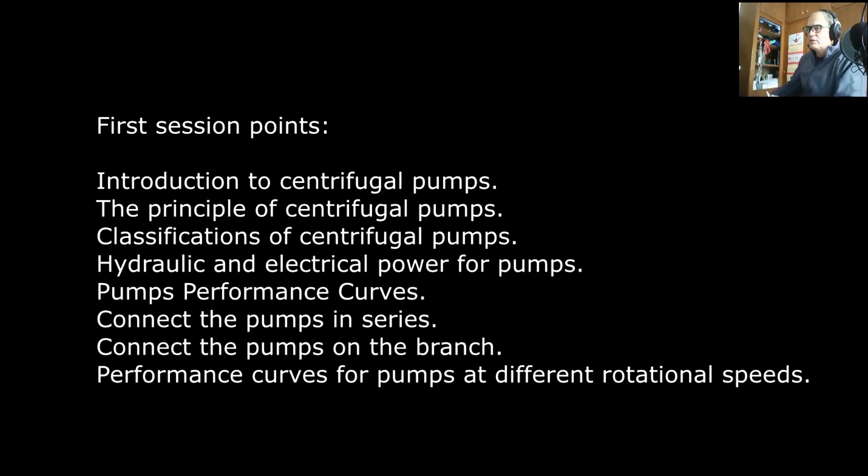Many thanks to you. Today we are going to speak in the first session about the pump. This is Haytham Bakour, Mechanical Engineering, graduated in 2002, and I work as wash coordinator with ACU.

We are going to start about fundamentals of pump science, categorizations, and else.

These are used more than 95%. It has horizontal and vertical kinds of pumps and different kinds of pumps.

First, what is the purpose of using the pump? We are using the pumps to move the water from a low level to a tank in higher level, so from low pressure area to higher pressure area.

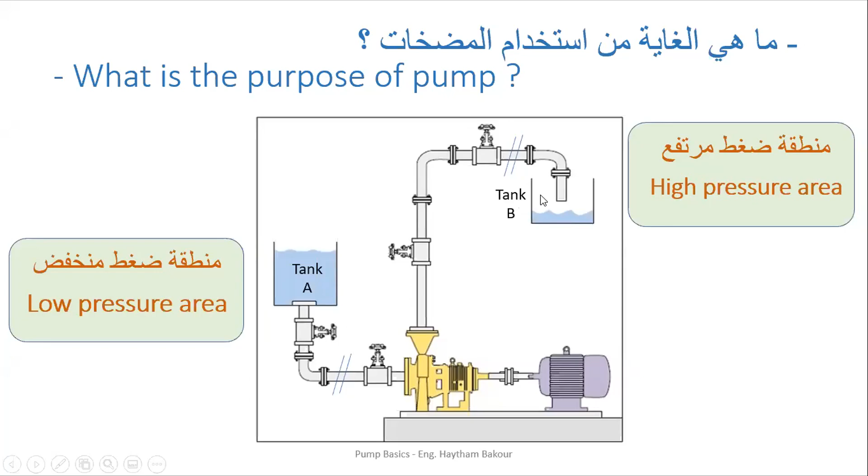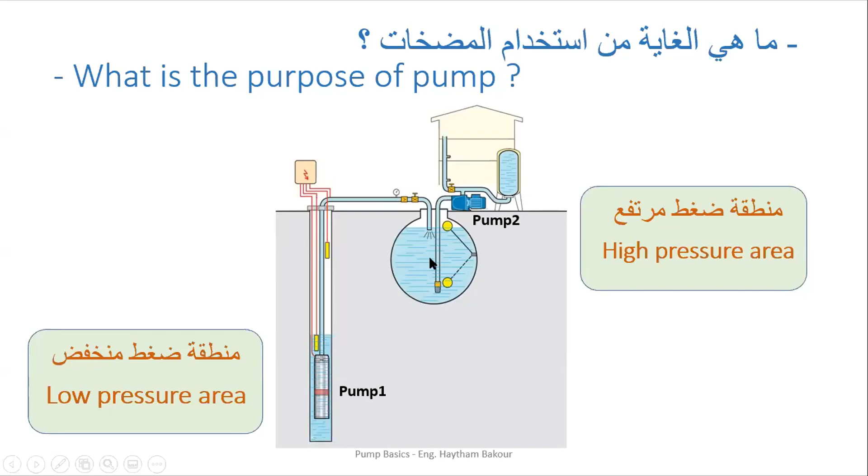The other example is that we are pumping the water from a well into a ground level tank to serve the population through using pump 1. As pump 1 is transferring the water to the first tank, pump 2 is going to transfer the water from below the building to the building. So the pump usage is to transfer the water from a low pressure area to a higher pressure area.

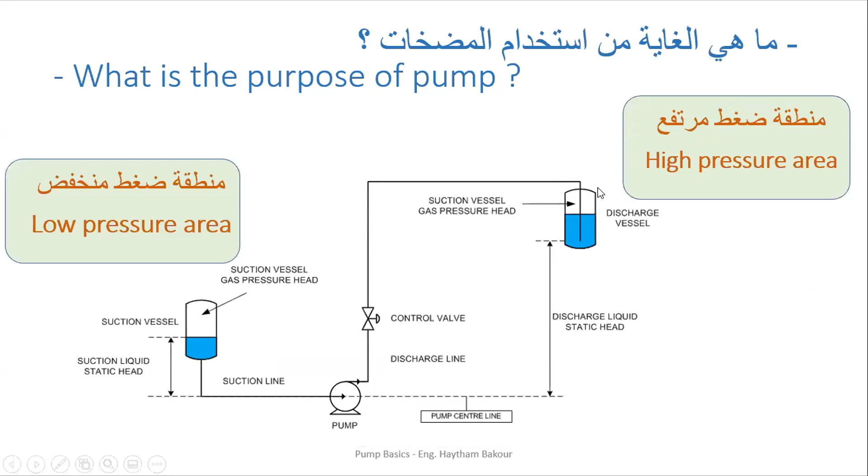As we can see in this chart, it is transferring water from the lower tank to the other tank in the upper right corner.

The other part is the shaft of the pump, and it is the part transferring the power from the engine, either electrical or diesel engine, to the impeller to move the power and make it rotate. And the shaft seal protects the water within the pump, preventing it from leaking to the bearing and the shaft, as the water in this section is guarded and prevented from leaking.

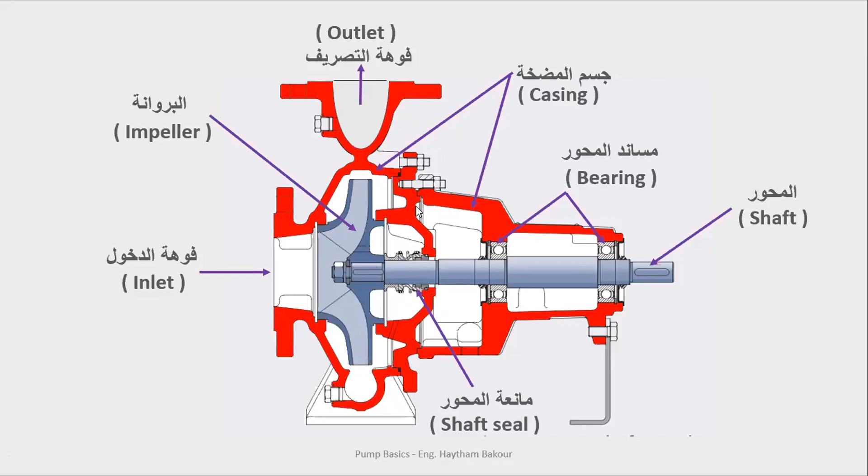We can see in this chart this section of the pump. As we can see, it is the entrance. The water is going to the impeller, and the impeller pushes the water upward to the outlet. The shaft here is moving the movement to the impeller.

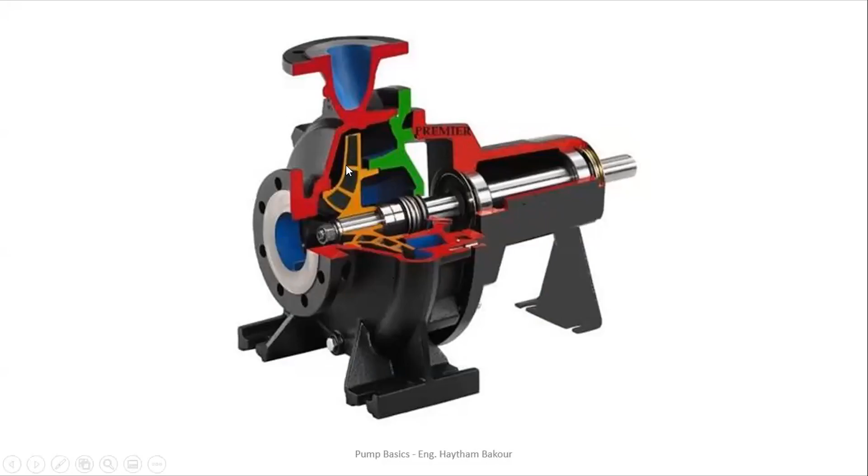We can see here an example of it, a very good movement example, from the inlet to the impeller and then to the outlet, pumping the water to the upward outlet.

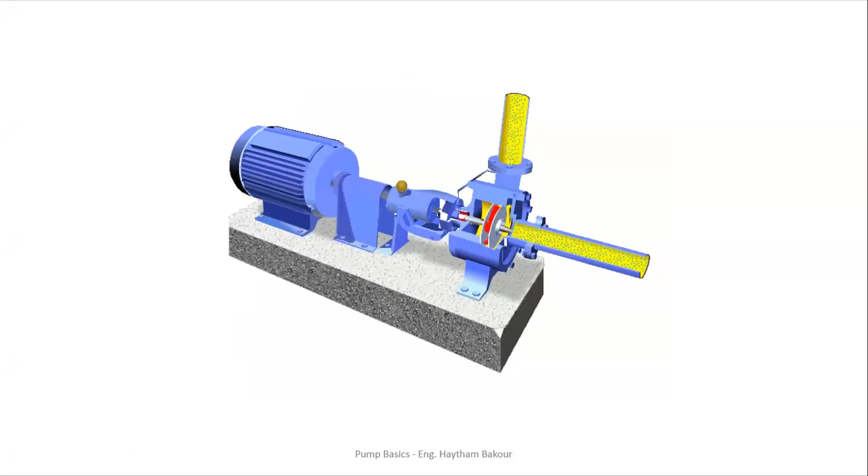The water enters here from the inlet and moves to the entrance of the impeller, which we call the eye of the impeller. In this chart, it comes from down below, and then the water goes between the impeller, gathering in the surrounding area, and then it goes out through the outlet of the pump.

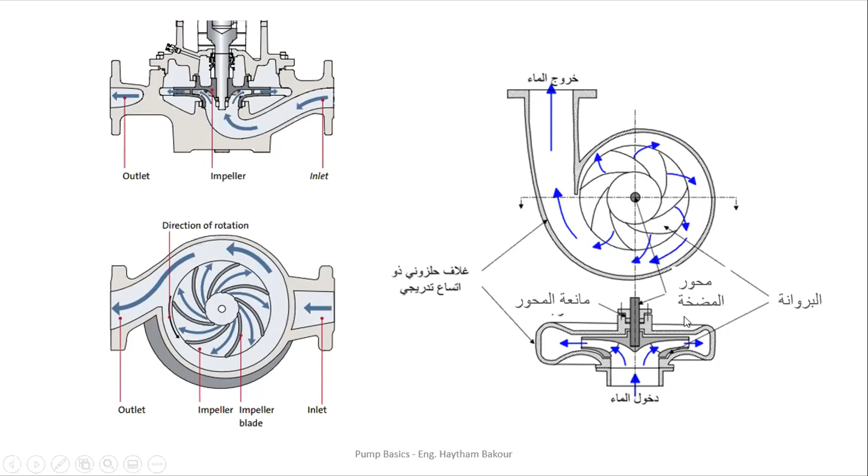This is another chart with more details and more naming of the parts, to give more detail about every part of this pump. We are going to talk about the classifications of centrifugal pumps.

We are going to speak concisely, in short, as many classifications are based on the reference and the company categorizing this. We are going to talk about centrifugal pumps used in everyday life routine.

One of the classifications for pumps is about the shaft position. If it is horizontal, it would be called a horizontal pump, while if the shaft is in a vertical position, it would be a vertical pump.

When there is one impeller in the pump, it would be called single stage. So the pump on the right would be called vertical single stage, while the one on the left is horizontal single stage.

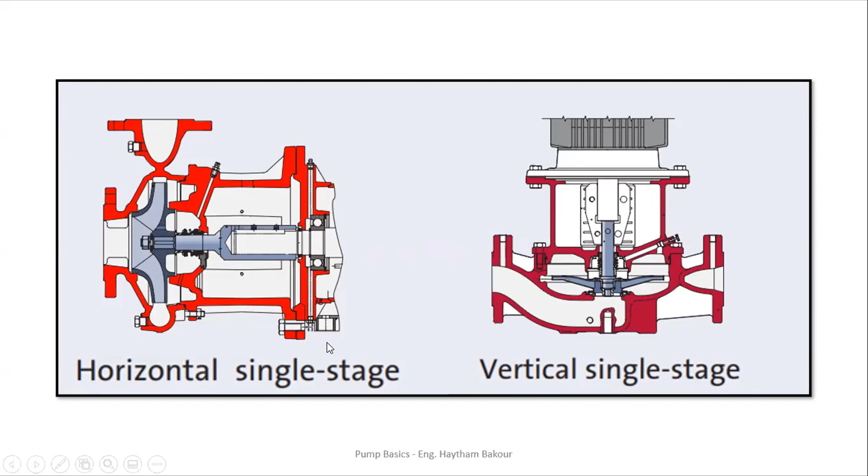We can see here two other kinds of pumps. The one on the right is a horizontal multi-stage pump. When we have more than one impeller, we have a multi-stage pump. On the left, we can see a vertical multi-stage inline pump.

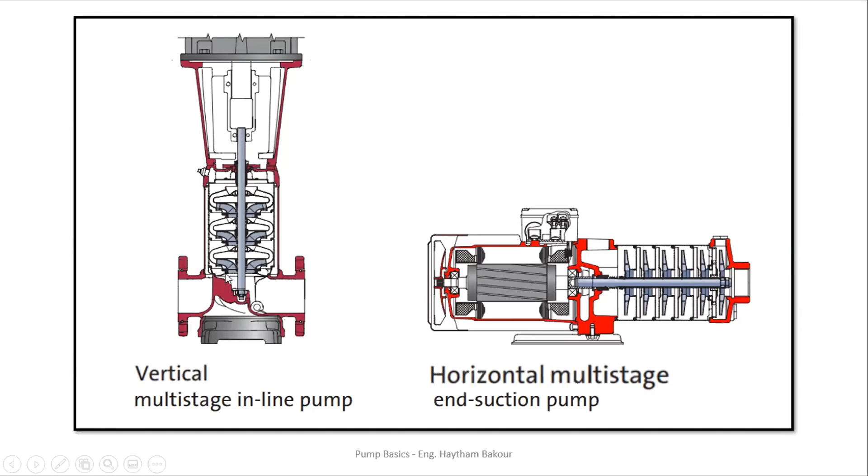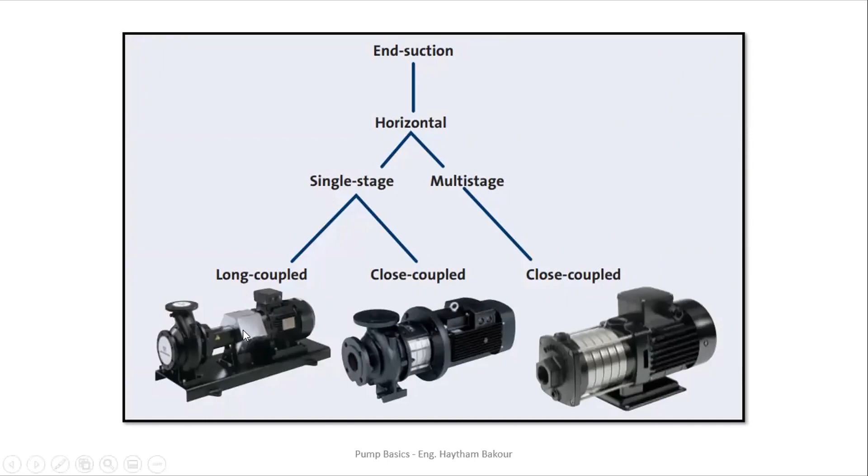There is another categorization for the pump where the motor, the engine, is separated from the pump, and something is connecting them together. This is called a long-coupled. But where the pump is directly connected with the engine, we call it close-coupled.

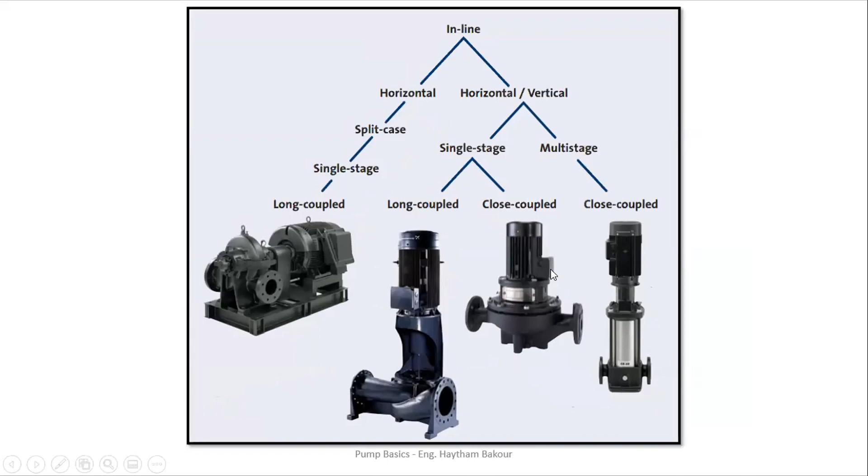We can see here in this chart many classifications based on one style of companies, which covers a very big part of the pumps, but we can't talk about all classifications of pumps as we have many different kinds, either vertical or horizontal, single stage or multi-stage.

And there is another categorization for the pumps based on the impeller shape or style. We have the impeller where the water enters from one side - this is a single suction impeller. While in some impellers the water comes from two sides, we call them double suction impellers.

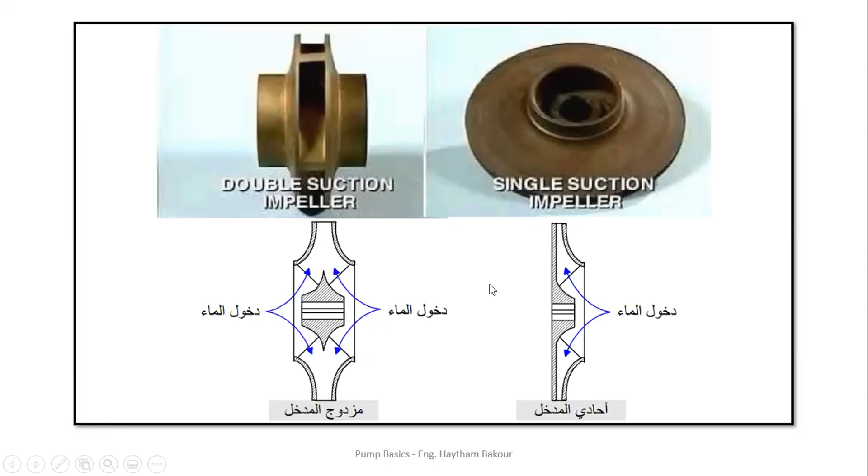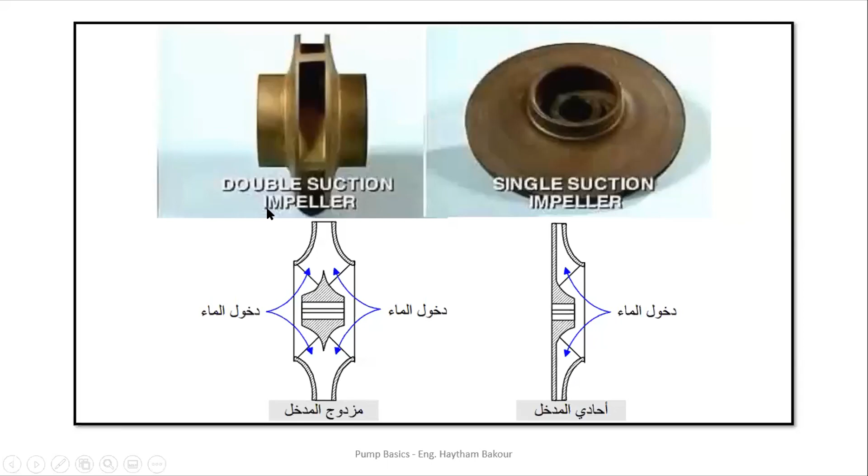The difference here is based on the design of the format. We are going to speak about the one-side suction impeller, where the water comes from one side and goes out from the surrounding - this is the shape of the pump. The second shape is the double suction, where water comes from two sides of the impeller and goes out from the surrounding, which needs a special design for the pump and its body.

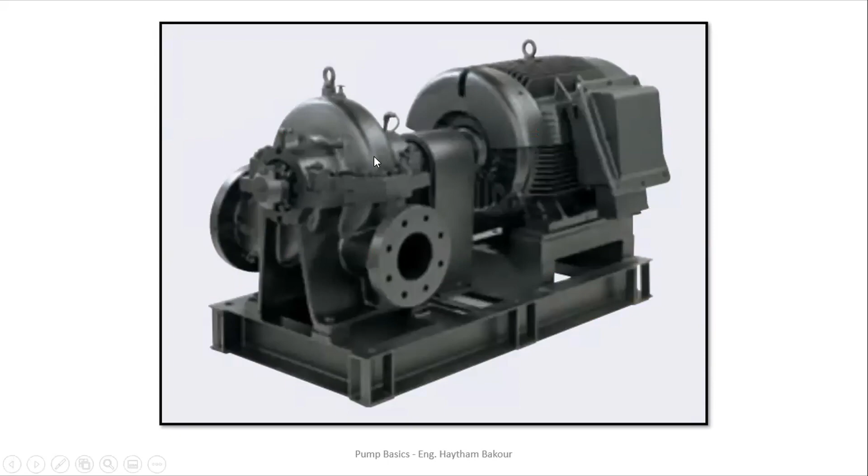We can see here in this picture, in the upper part, the connection, and the shaft beds are placed in different places. They are going to be on the sides of the impeller.

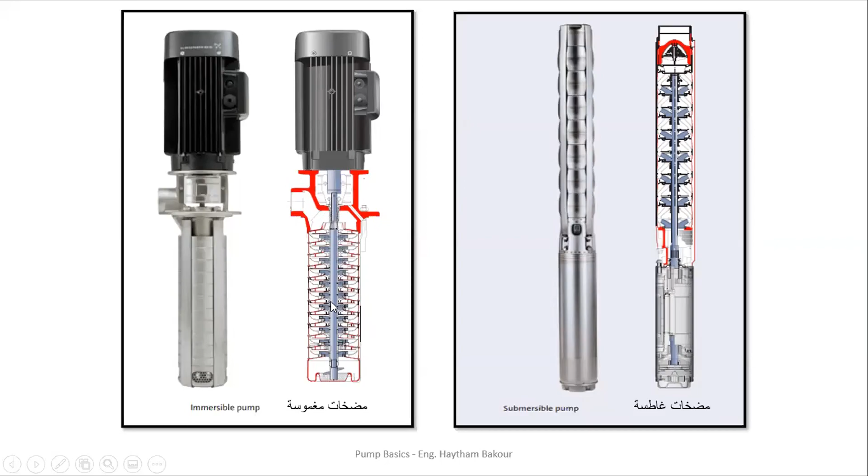There are some other categorizations for the pump. We have the submersible pump, completely submersible, where the motor is going to be inside the water completely, and those have been used mostly in wells. The other kind is the immersible pump, which is a vertical kind of pump where the motor or engine is outside of the water - we call them immersible pumps.

What are the advantages of centrifugal pumps? The pump has a relatively simple shape, as we witnessed, very easy to install. It has low cost in comparison to other kinds of pumps.

Thirdly, its reliability is high, with minor faults and it doesn't require much maintenance. If you choose your pump appropriately with high standards, it can work even for 30 years or more in continuous operation with some minor maintenance.

Fifth, it has multiple possibilities and uses, as we can use it for drinking water, sewage water, chemicals, even hot water. In addition, you can use it with different kinds of usages for power and for flow. We are going to provide you with some details later on.

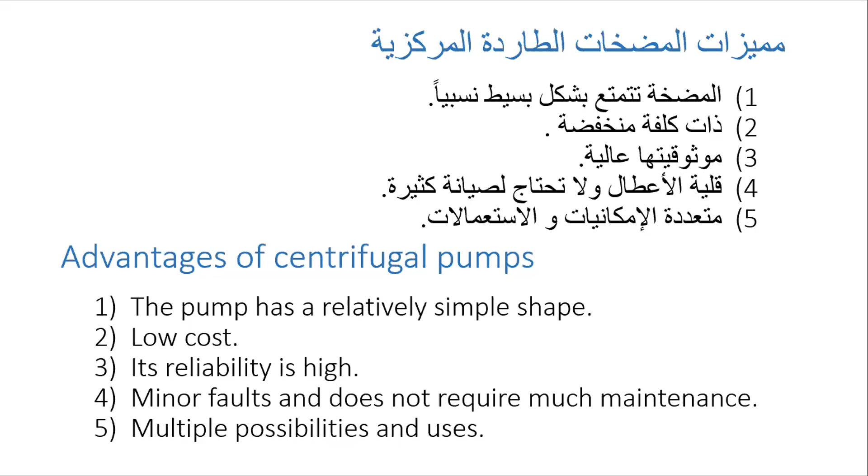We are going to speak under the second topic about the pump power equation - how we can derive those equations, how we calculate and arrive at them.

Firstly, we are going to speak about the sequence of power transmission of electrical pumps. We have electrical engines transferring power to the pump. We have P1, electrical power, through the electrical wires to the motor, the engine, and then we have mechanical power P2 on the shaft of the engine. This mechanical power is transmitted directly to the pump, and within the pump it becomes PH, hydraulic power.

The power is going in through the wiring, then it's going to be mechanical power on the shaft of the engine as one mass, and then it's going out as hydraulic power.

The first shape is the pressure shape. The other form is the flow, related to the amount of water we are pumping. We have motor efficiency, which shows some drop down in the level of efficiency of the engine. There's also drop down and losses in the pump due to hydraulic and mechanical losses, which we call pump efficiency. As pump efficiency increases, the loss percentage decreases.

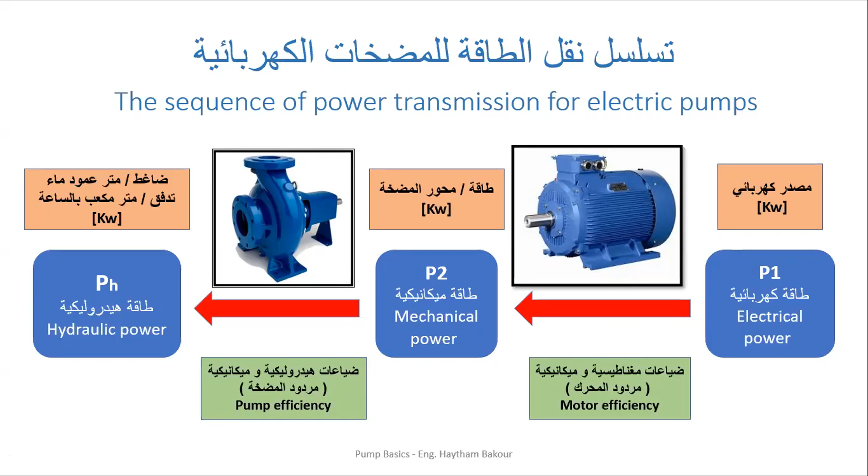This is related to the best choice of pump model and the quality of its manufacturer and specification. As we said earlier, pumps are used to transfer water from the low pressure area to the high pressure area, from tank A to tank B.

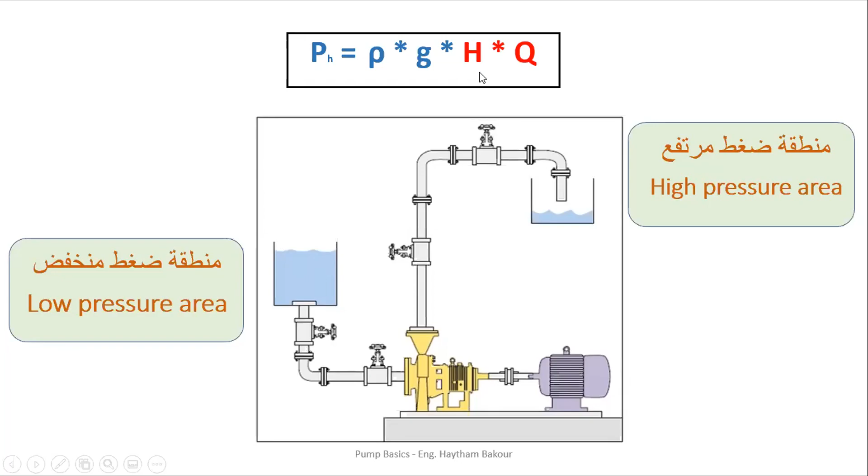The PH equation: rho is the density, g is the gravity, H is the pressure, and Q is the flow. Rho and g are constant, while H and Q are variable based on the studied cases. We are going to explain this equation and the best way of calculating the hydraulic power.

The hydraulic power for the pump is H total dynamic, multiplied by QS (the flow rate), multiplied by rho (the liquid density of water), multiplied by G (gravitational constant), giving us PH, the hydraulic power of the pump, in watts.

Rho is 998 kilograms per cubic meter, and G is 9.81 meters per second squared. We use Q as the flow rate, where QS is Q divided by 3,600, to get the flow rate in cubic meters per second.

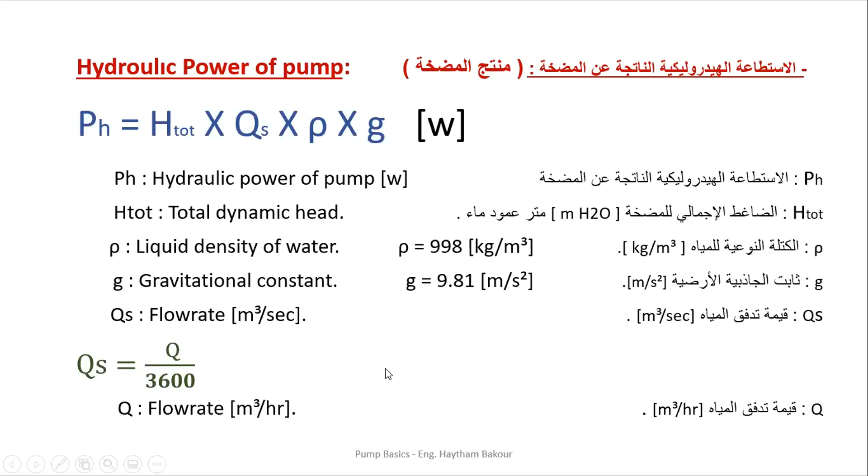Now we talk about the power of the pump. The efficiency of the pump represents the loss we have. It is PH divided by the power of the pump. As a result, P2 is equal to PH divided by the efficiency of the pump.

We are going to replace this with the prior equation and add this value. So P2 is H total multiplied by QS multiplied by rho multiplied by G, divided by the pump efficiency.

From the second stage, we find P2 equals H total multiplied by Q, where we replace Q divided by 3,600, multiplied by 998, and multiplied by gravity, then divided by 1,000 to reach kilowatts.

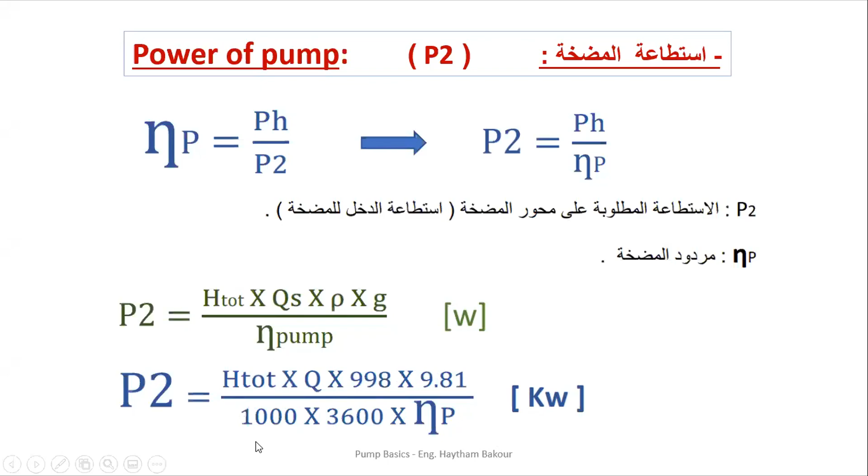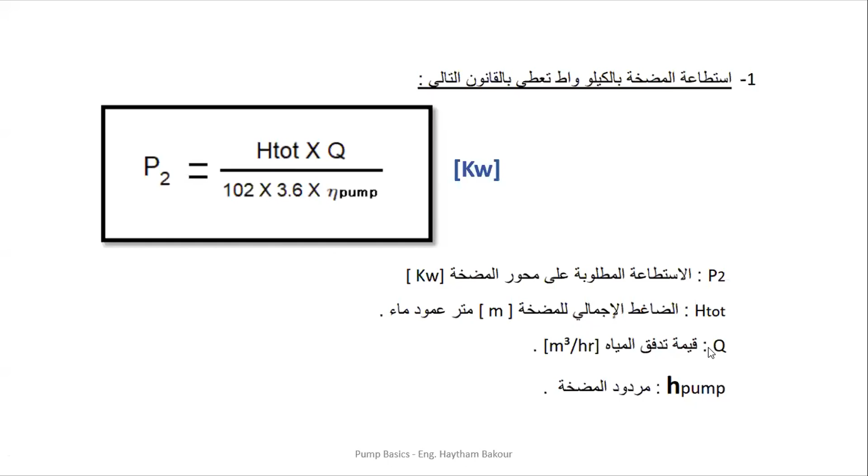We are going to use only this equation, the reference equation to calculate the power, to know how much power this pump is giving. Q is in cubic meters per hour, and H total is in meters of water.

We are going to move to calculate how much motor power we have.

We have it as P2 divided by P1, which is mechanical power divided by P1, the electrical power. So P1 is the power in, which is the electrical power, and we can see it through the current.

He's using too many technical expressions. Sorry for not following up exactly with him.

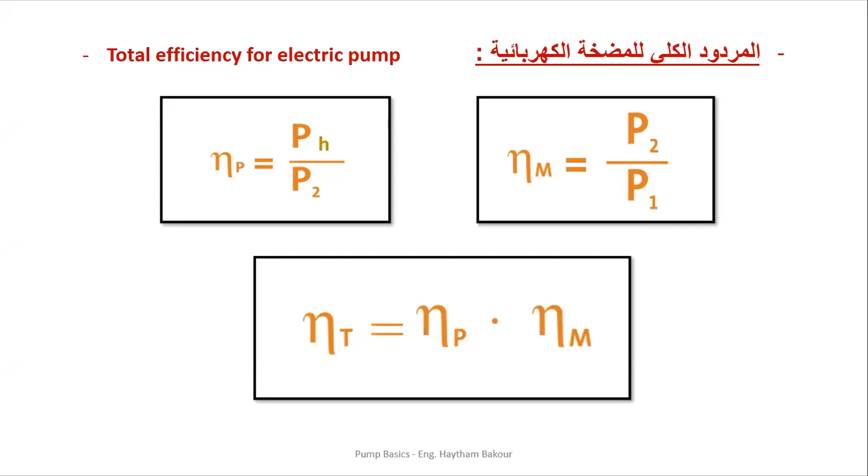Recently, we are going to use Excel based on the equations we have used. This is going to be shared with you alongside the presentation for this workshop. It will calculate the power of the pump, so we don't need to redo all these calculations again and again, and it is really easy to implement.

So if we have 125 cubic meters per hour, and the efficiency of the pump is 75%, and the efficiency of the pump motor is 90%, we get as a result: power of pump is 18.16 kilowatts. The power of pump in HP is 24.35 HP. While the power of motor in HP is 27.43 HP, and the power of motor in kilowatts is 20.17 kilowatts.

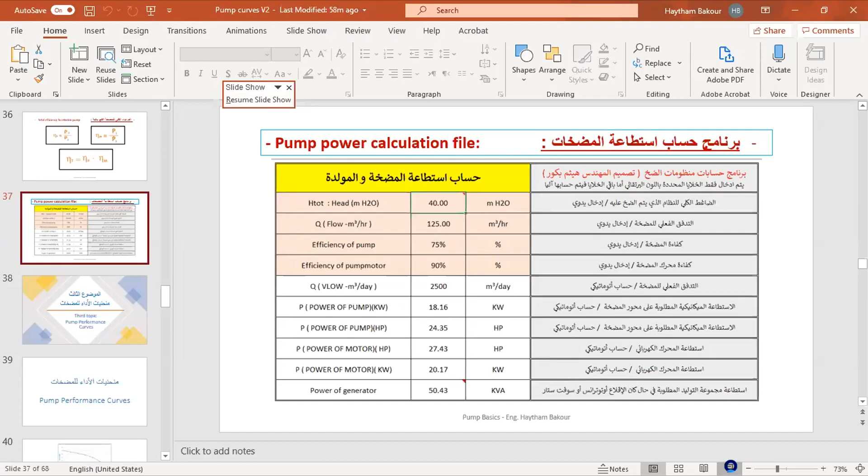Yes, I have a question. Between horizontal and vertical pump, what is the advantage or disadvantage of choosing the horizontal or the vertical?

For the bigger space and higher flow rate, it is preferred to use horizontal. For the lower flow rate, we prefer to use the vertical one. And we are going to talk about the pros and cons.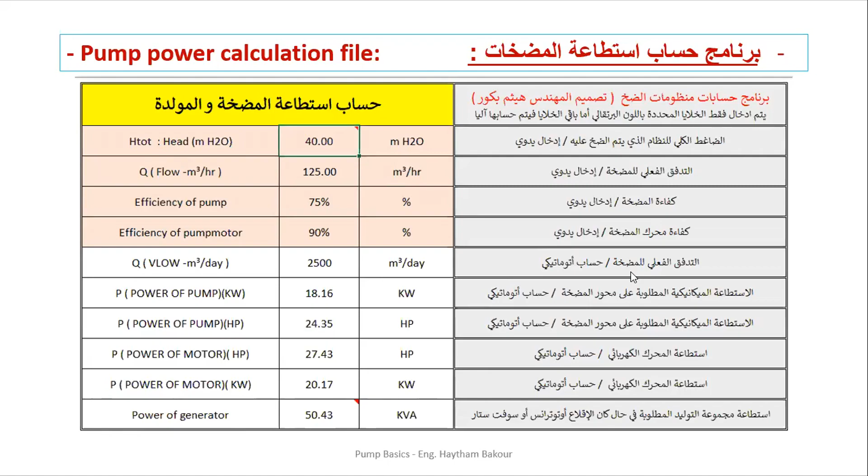Exactly. We are going to move to the last part. It is about the pump performance curve, and it's very important.

This curve represents the special identity of each pump, and we can't use or deal with a pump without reading its curve. The pump should be chosen based on its performance curve. When we choose a pump without taking its curve into consideration, we end up running it with no best condition, and it would work for a year and then break.

It may be a malfunction in manufacturing or selection. With a precise, good choice of pump, we can have it working for 30 years. But we need to choose it based on special specifications and the needs we are using it for.

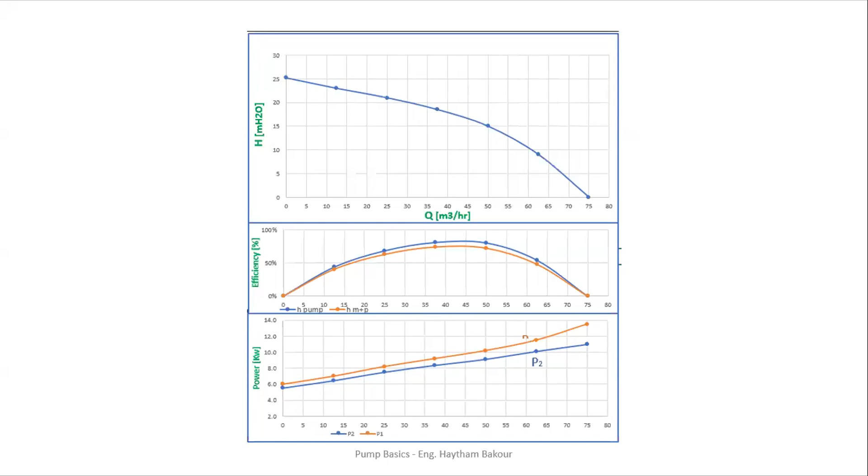We are going to talk in detail about those specifications, which represent the special identity of the pump. No one can choose a pump without knowing what its performance curve means. We should conduct enough study about those curves, and we are going to speak about them.

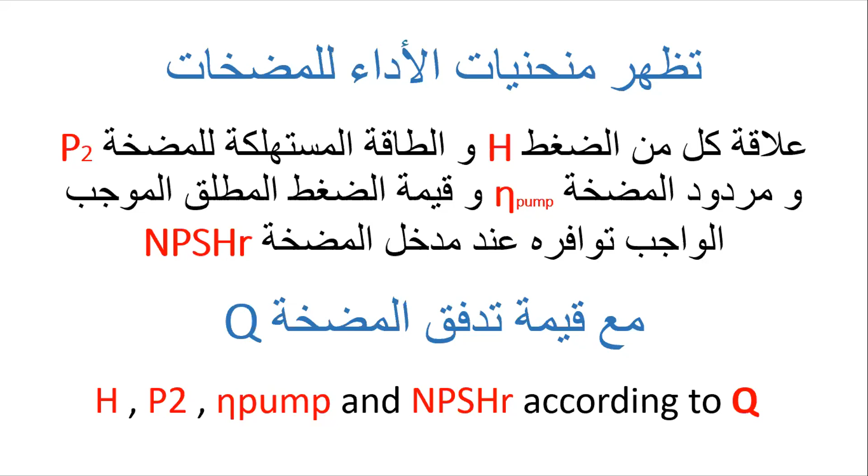The performance curve provides the pressure, consumption power, and efficiency. And the ultimate pressure should be there as NPSHR based on the flow rate going into the pump. We are going to speak about it in detail.

The first curve is the HQ curve, and this curve is very important. It represents the relation between the flow rate and the pressure head. As the pressure head value varies, the flow rate is different.

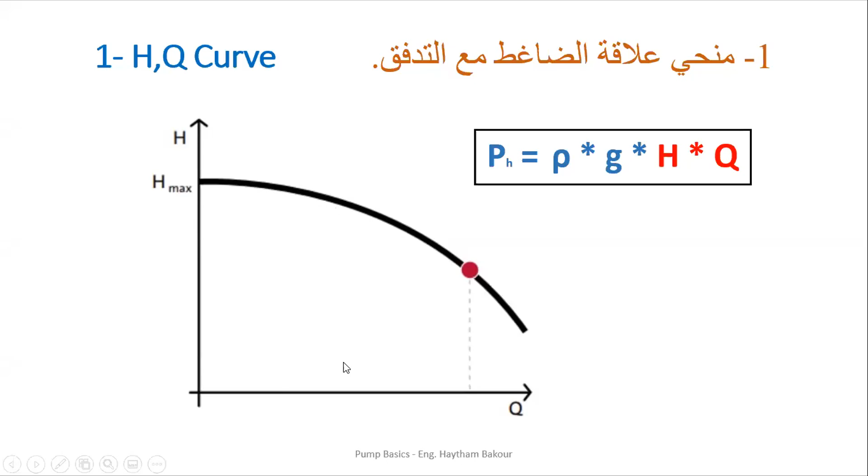If we have a pressure at that point, and we apply this pressure on that curve, we can see how much flow rate we have, the needed flow rate. And as it varies, the flow rate varies.

This is another chart of this curve. If we had this pressure head, we apply it on the flow rate, so we have 30 cubic meters per hour. While if we have this other value, we have 50 flow rate cubic meters.

So it is based on the pressure head.

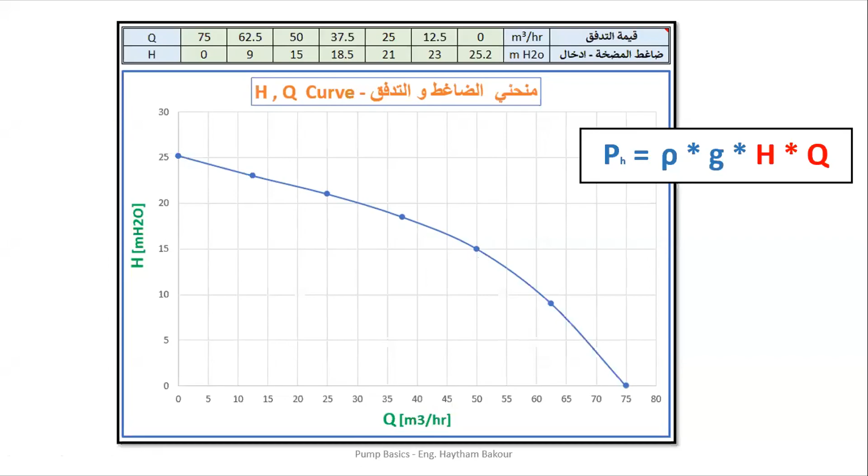The other curve is the relation of the pump's power with the flow, which is the power Q curve, and it is a linear relation.

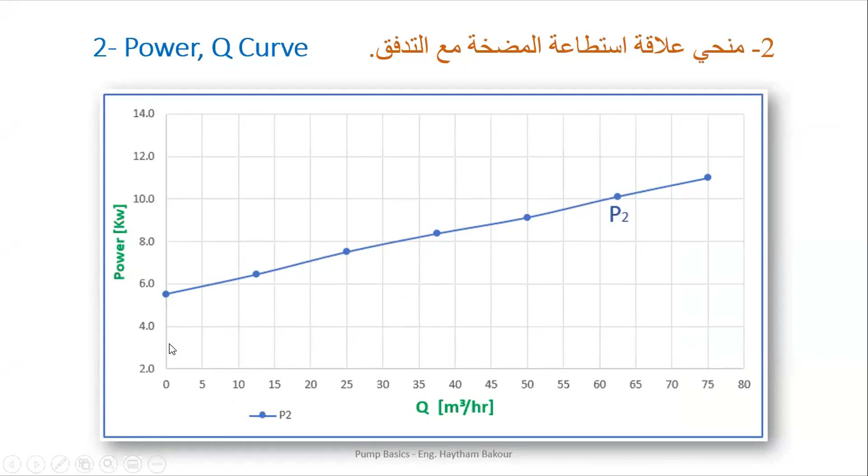As the pump's flow increases, there is an increment in the power Q curve, and we can have a different measurement of the power as KW.

We can see the other curve here as P1, in orange, which is the curve of the power of the motor, while P2 is for the pump itself.

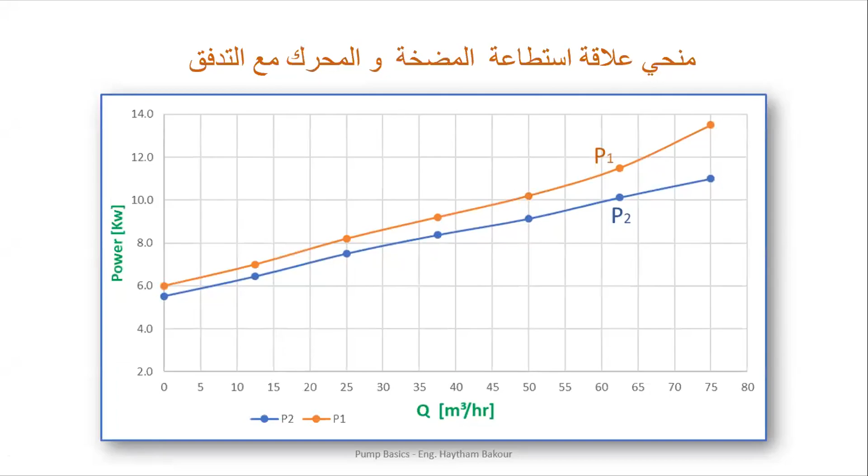We talked about its equations earlier.

Let's go to a very important chart, which is the efficiency Q curve, and the relation between the efficiency and the flow rate.

We can see when the flow rate is zero, with a complete closure of the pump, the efficiency is zero.

And as the efficiency increases with the flow Q, we call the peak of this curve the best efficiency point for the pump.

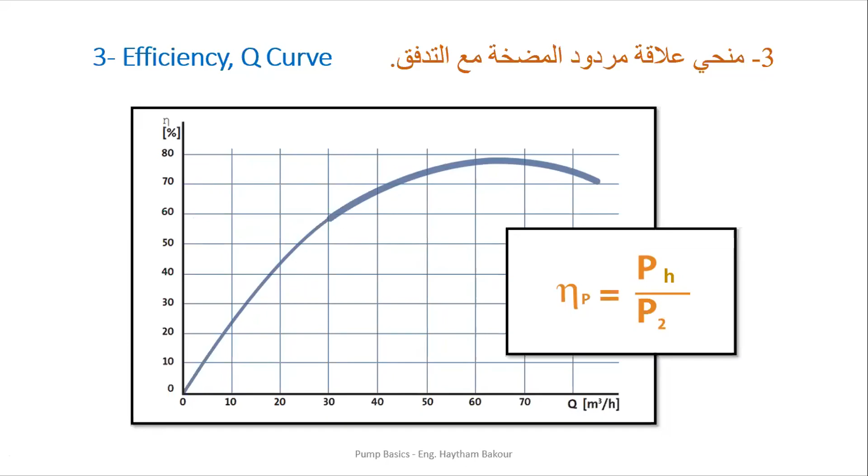So we would lose a lot of efficiency as losses, and cause harm to the pump body.

The last curve from the performance curves is the NPSHR curve, which should be available at the entrance of the pump alongside the flow. It is very specific and complicated. For us it is simple, but we are going to explain it. It is among the performance curves.

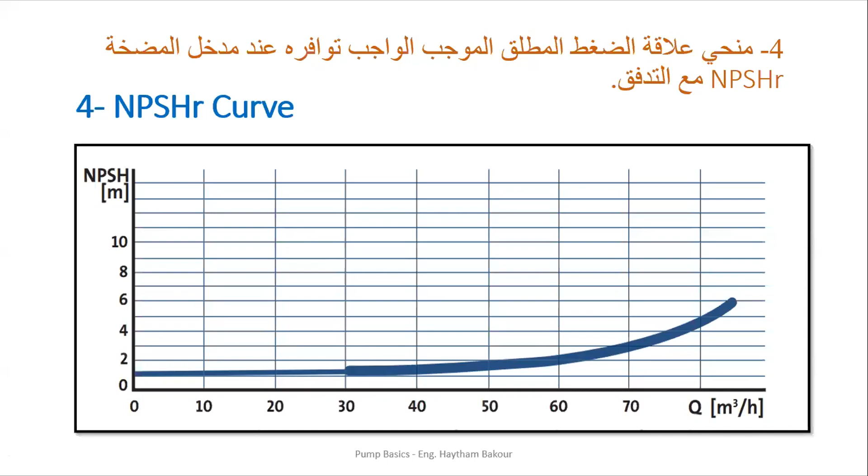We are going to explain that in detail within the next workshop or presentation. These are, in general, the performance curves for the pump.

I think you can continue. If someone has a question, they just have to intervene or raise their hand. Yes, yes, thank you.

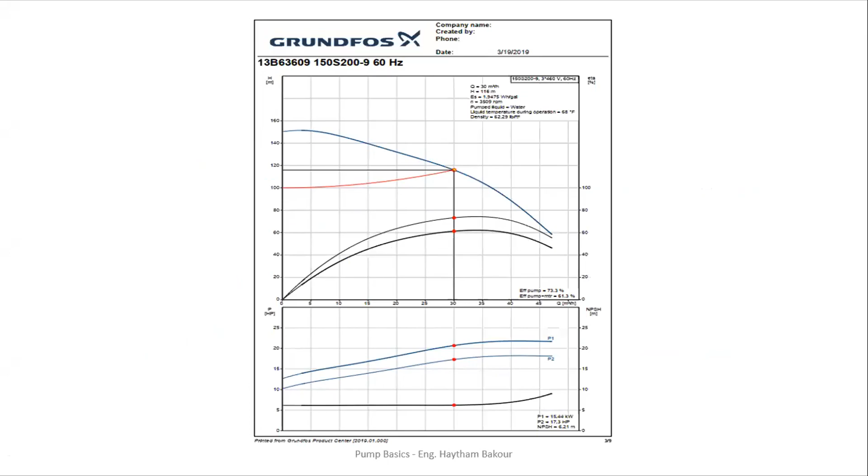We are going to explain the methods of testing pumps and drawing performance curves for pumps. We have talked earlier through the last sections about the performance of the pump. But if I have been invited to test a pump, or asked to draw the performance curve for it, how can I do that? We are going to explain that in detail so we can understand exactly what the performance curve is.

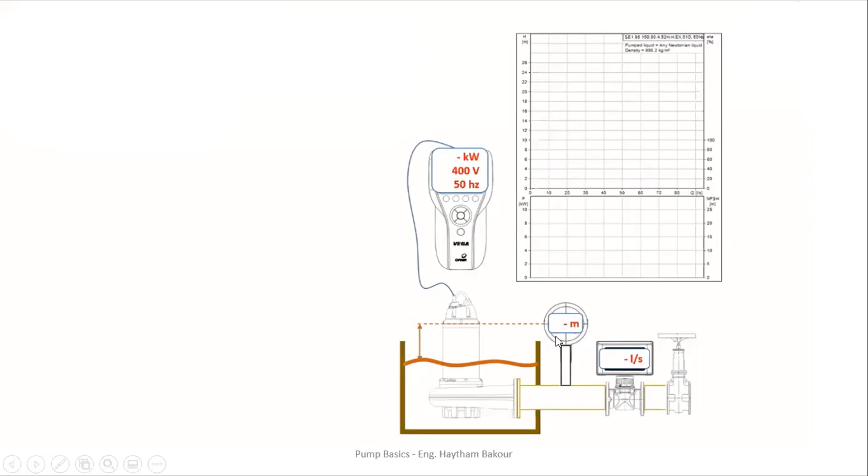To carry out the pump testing process, or draw the performance curves of the pump, we have the pump here. We install a flow meter at the exit of the pump, and a pressure gauge measured in meters of water. We are also installing a device here to examine how much water we have at the entrance of the pump, and we have this valve at the exit of the pump.

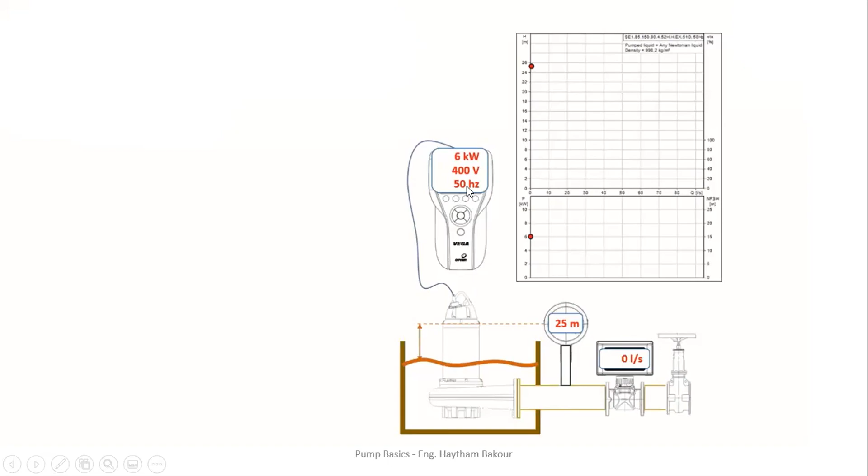At first, we close the valve so there is no flow rate, it is 0, and then we start the pump. We can see that we have 6 kilowatts, while the pressure gauge reads 25 meters of water, while the flow is 0.

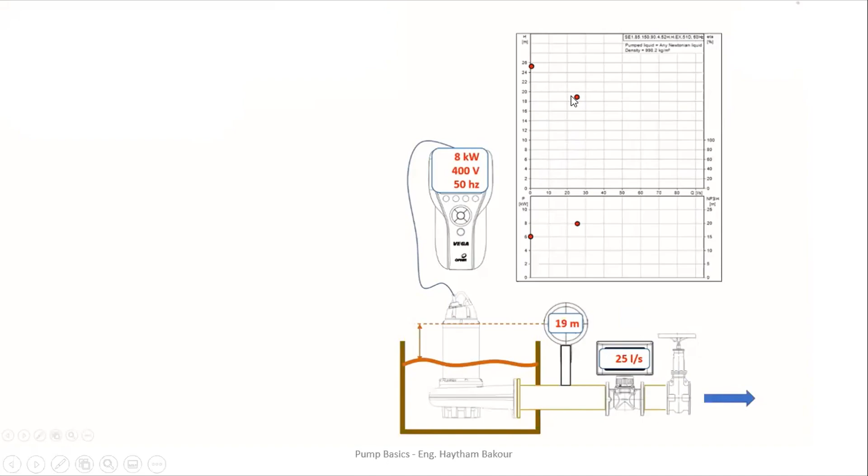Then we open the valve gradually, so we have different measurements. When it is 25 flow, we fix the valve and read the parameters. So when it is 25 liters per second, we can see that the pressure gauge is 19 meters of water, and we put it here, 19 columns of water at 25 liters per second, and we have the power increased to 8 kilowatts. We add this to the performance curve.

Then we increase the valve opening, so we reach 50 liters per second, and we have 14 meters of water, and 10 kilowatts. Then we have new points here, we draw them: 14 meters, flow rate of 50 liters per second, and we add them to reach 10 kilowatts.

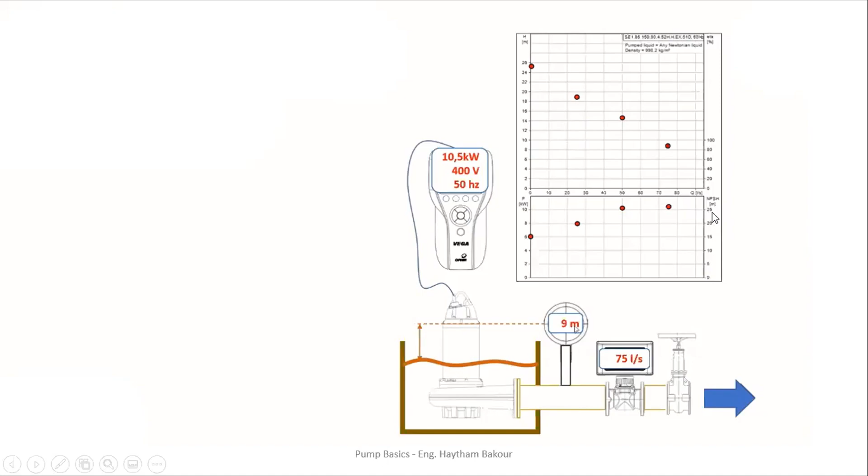Then we open the valve to have 75 liters per second, and we read the value of the pressure gauge and how much electricity we are using, drawing the point, the one before last, for the performance curve: about 9 meters of columns of water at about 75 liters per second, with 10.5 kilowatts.

And to draw the last point, we open the valve until reaching its end and read the parameters. Here we can draw the power curve; we have drawn that manually, and we obtained those curves through calculation, replacing the values here to see the efficiency of the motor and of the pump. We have explained how we draw those curves, and to understand better how things are affected through the power curve.

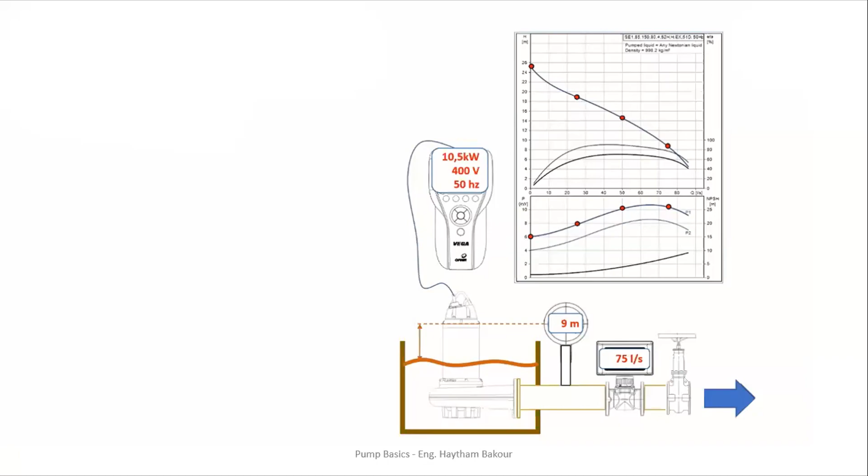So here everything is changing, varying based on the flow rate.

Now we are going to talk about connecting the pumps in series. Usually we have to connect the pumps in series; let's talk about why we connect them in series. We use it to increase the value of the compressor. As we are doing it in series, Q is equal to Q1 and Q2, while H total is H1 plus H2, so it is cumulative for both of the pumps.

We can reflect that on the power curve, shown in black for each pump. When we connect P1 plus P2 in series, we can have a higher and double compressor flow rate, as maybe we need a higher pressure. So we connect those pumps in series, reaching H total equals H1 plus H2, where the flow rate is stable for both of the pumps.

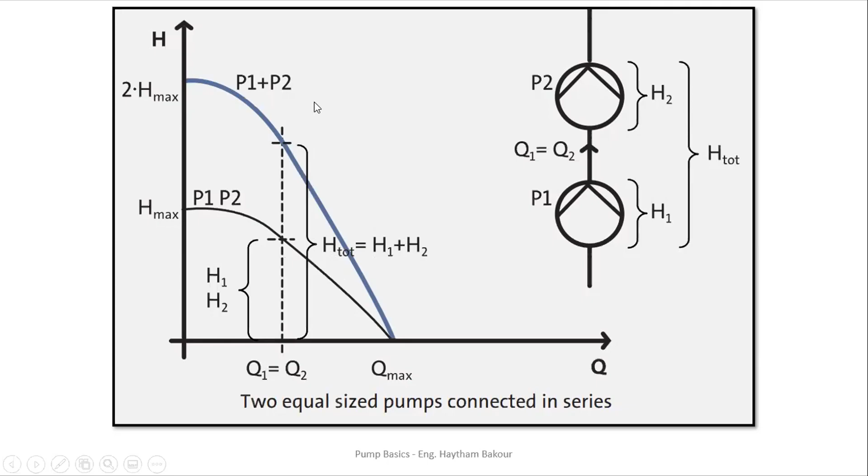We have spoken about how we use many stages, about impellers, and it is the same as connecting them in series.

If we had 3 impellers in series, the cumulative value of the compressor equals the compressor value dedicated to each impeller multiplied by 3, because it's impeller 1 plus 2 plus 3.

In the submersible pump, we might reach 25 or 30 impellers.

So we have this power curve and performance curve, and as we can see here, the first one is the number of impellers, which is 1. The pressure would be less as we increase to 4 impellers, 6, 7, 8, 10 impellers.

So we reach the pressure based on how many impellers we have, multiplied by the pressure per impeller.

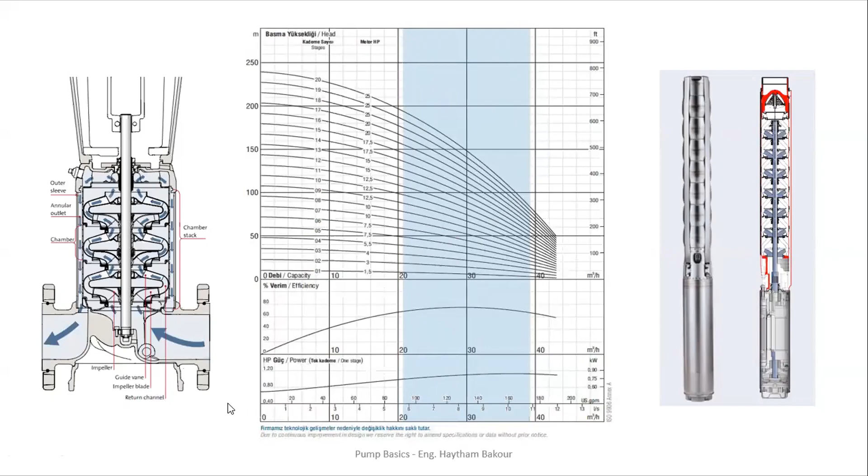Now we are going to talk about connecting the pumps in parallel.

Currently it is used on a very wide range in advanced, developed countries using inverter technology. It is used to measure and change the rotational speed of the pump.

As we start the pump at 100% speed, we can have the flow rate at its maximum. When we start it at 80% of rotational speed, the flow rate would drop dramatically, but the performance is still good.

While if we decrease it to 50% of rotational speed, the flow rate would decrease by less than 50%. In addition, the efficiency value would become very low.

We need to achieve that with normal, traditional pumps, so we need bigger tanks to prevent frequent starts and decrease the number of ignition and stopping times of the pump.

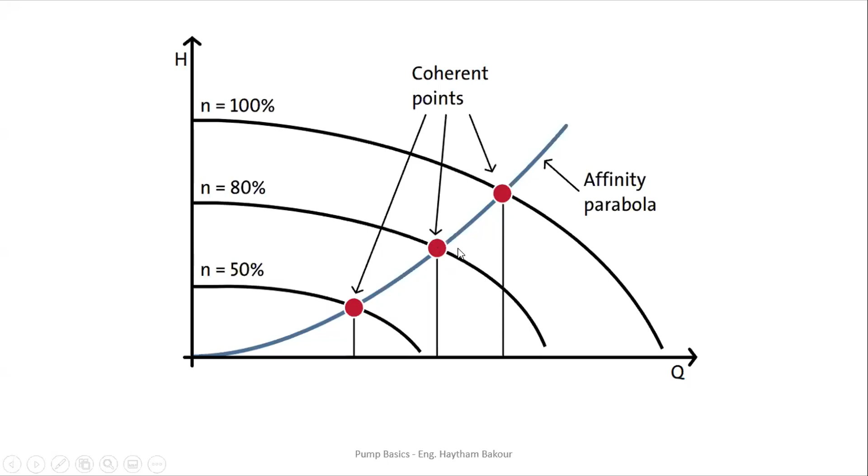And then we can use a smaller tank rather than the traditional bigger tanks, and the pump would only work at a useful level when there is smaller usage of water.

We can see here in this picture the relation between N1 and N2, which is the speed we are changing, and how much it affects the pressure and the flow rate of water.

So the speed would decrease along with the value of the compressor. So when we use the inverter, we need to study the case precisely based on the timeline and the variety of the speed.

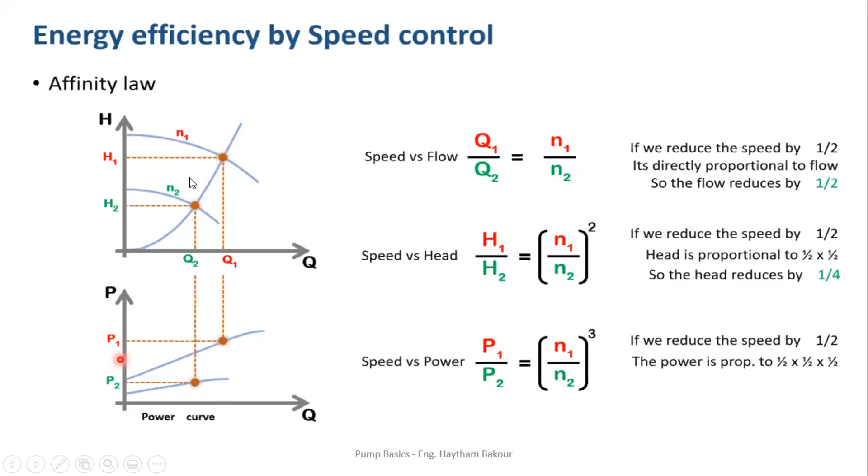So maybe if it drops below some values, the pump would work without even sending any water, which would result in increasing heat and malfunction later.

From this study, we can see the efficiency of the pump would change based on the rotational speed. Many things to consider at the end.

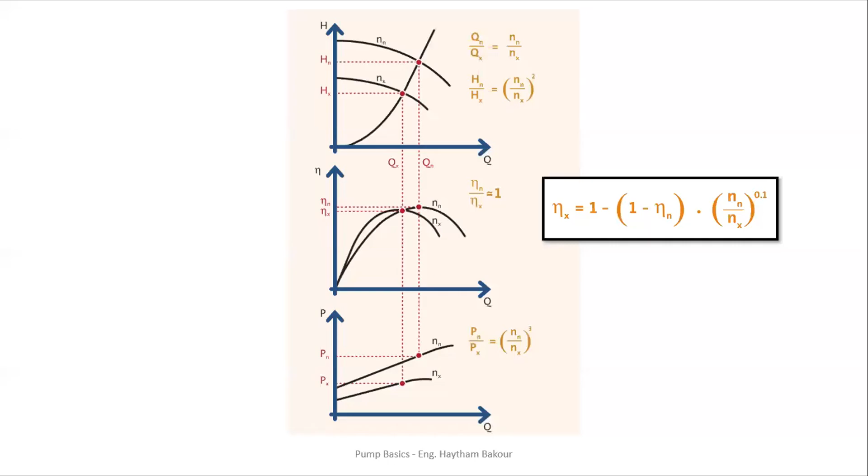From my side, just one question about pumps connected in parallel. In terms of efficiency, does it make sense to have two pumps in parallel, or is it better to have one big pump only, for the same elevation?

Always on engineering systems, two pumps are better than using one pump. Two pumps on parallel, plus one as additional, so three pumps total. If we have a load to reach 100 cubic meters of water per hour, we put three pumps, each one producing 50 cubic meters per hour.

So on parallel, two of them would work and one would be as backup. If we need to do any maintenance for one of them, we stop that pump and start the other two. There is no way in practical engineering life to use one bigger pump without a backup pump for that.

The best system is to have two pumps, each covering half of the usage, and the third one as backup, so we can switch between those three, starting two of them at a time and keeping the third as backup all the time. Thank you very much.

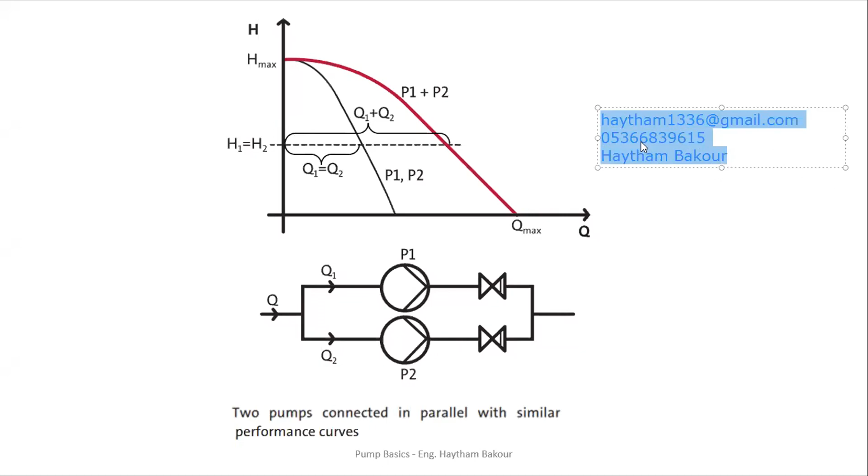Haytham, that's a question for you: how to calculate the type of pipes, thickness, material, etc. we need to use in the motor of the pump, as parts of the equation?

For this question, we haven't mentioned anything regarding the pipe yet. This topic needs a dedicated session. We are talking about the flow rate in zero conditions without mentioning anything about the thickness and the type of pipe; it needs dedicated sessions we can cover later on.

Okay, just to jump in, sorry. Thank you very much for the presentation, it was very good. My question is, if we have a pump with X capacity and X strength already, then to calculate the type of pipes, what comes first, the piping or the pump? I don't know if it's clear, I know it's not today's topic, but just a short answer if possible.

We can't talk about the efficiency of the pump before the type of the pipe. The first thing to go is the pipe.